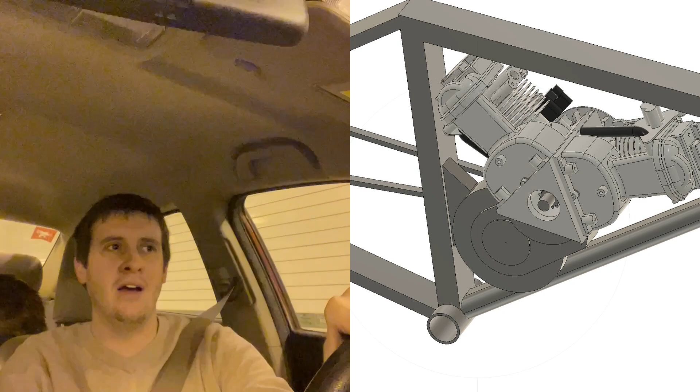Everyone, Ryan here with RDM, and we're going to give a motorized bicycle update. We're going to talk about that most recent video where my Piaggio bike was ripping up and down with the centrifugal max torque clutch and the pull start. I know a lot of people aren't very familiar with that, so we're going to talk about that, explain what it is, and we'll do a little deep dive on that whole situation.

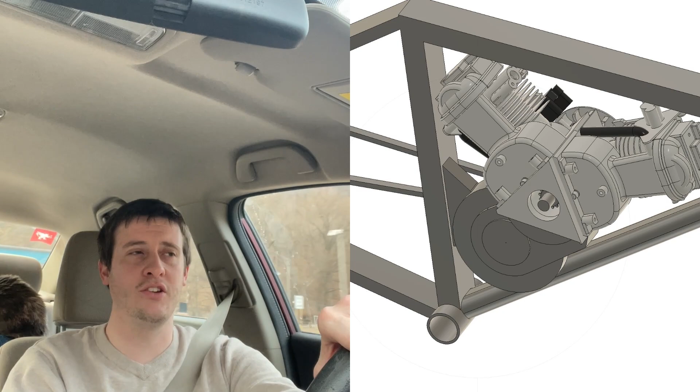We're going to talk about the crankshafts. I know there's a lot of people waiting on crankshafts, and the pre-sale's still up. And yeah, we got a lot to talk about with the crankshafts. It all ties together with everything.

And the final thing, the big thing I'm most excited about and I want to talk about, is that V-twin. And I know nobody knows anything about it because I never talked about it. I just put some vague pictures that aren't very completed, and yeah, so I want to talk about that. We'll get to that. It all ties together.

The place to begin is that latest video. We'll start with the specs. Well, anyways, I posted the video a few days ago. If anybody missed it, go into the group and search my name and you'll find the video. It's not a very good video, but it does demonstrate the basic function of that type of setup, and it shows the bike does go pretty good. It's not the fastest bike, but it might be. It could be. By the specs, it shouldn't be the fastest, but it still could be.

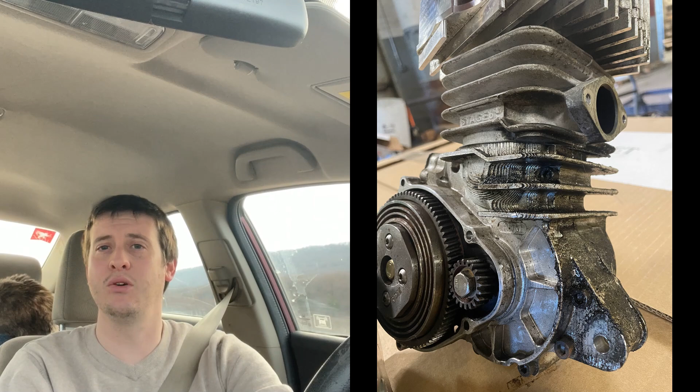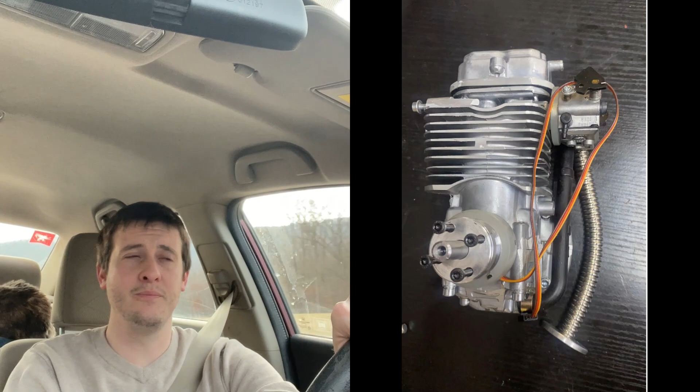So that's a 40-stroke Piaggio. That's not the classic 44.5 or 45-stroke. That's why it's using the stock head, the small head. And I know somebody was asking in the comments, does that keep the engine cool enough? It depends how you ask the question. In a race, I think it would probably work, but you'd be pushing max temp and maybe overheating by the end of the race. It depends on the track.

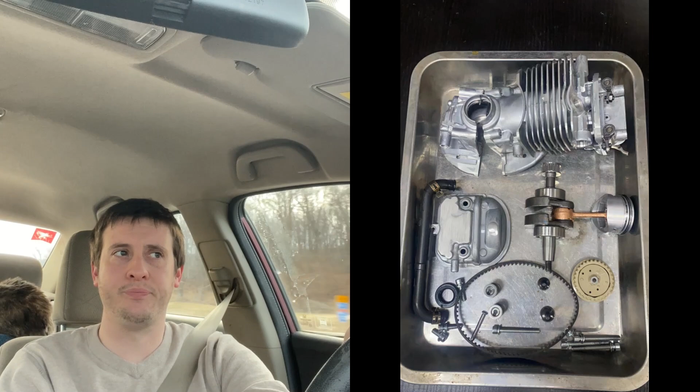If you were going to be trying to hold top speed for a long period of time, a long distance, it would probably overheat. But for just testing and working on my skills and doing quick little laps in the parking lot, it works well. You can probably see from the video, the bike gets faster and faster as it gets hotter and hotter. That's typical with these Piaggios, they like heat. They don't like being fully cold, but they still run good no matter what.

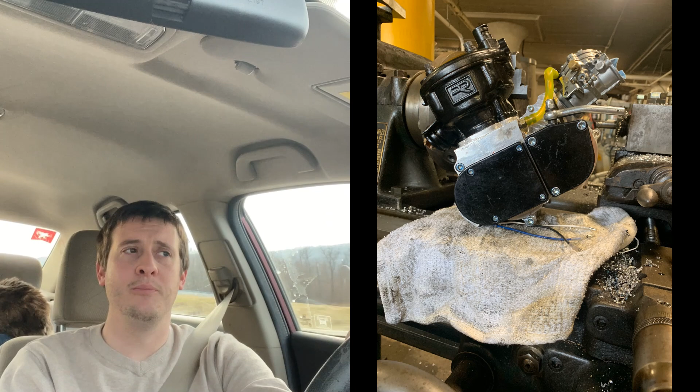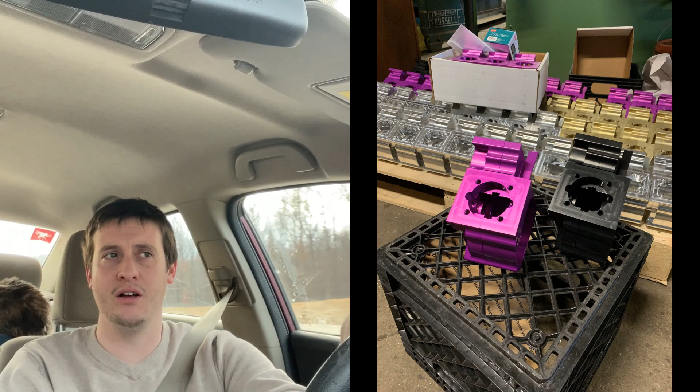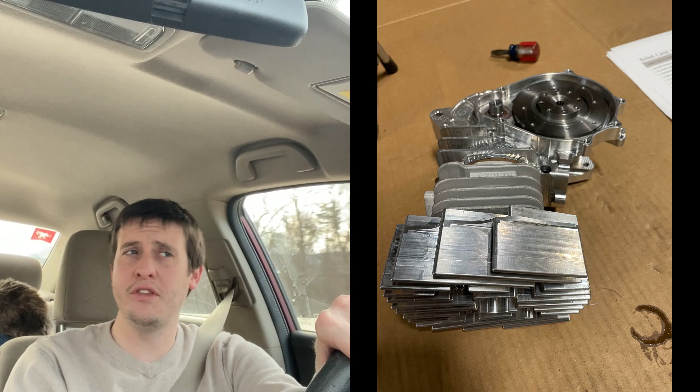Yeah, so then there's a lot to talk about, like my impression of that setup. A lot of people are familiar with that setup if they're coming from GoPeds or mopeds. A lot of them have that type of setup, just a centrifugal clutch. A lot of the 212 mini bike guys, you just hit the gas and it goes. And some of the things I'm about to talk about are going to seem real familiar if you are familiar with that type of system, which is a centrifugal clutch.

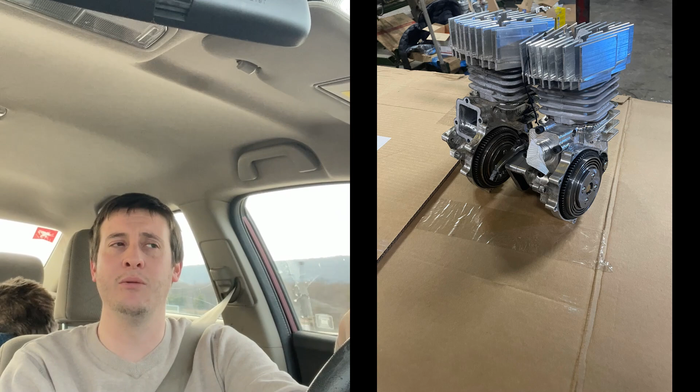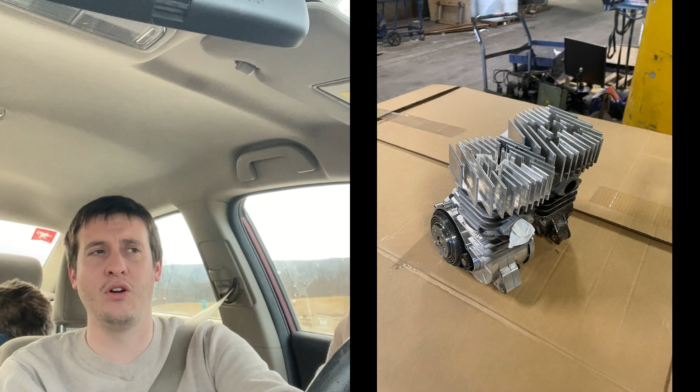I went from the $20 Amazon clutch, I'm sure everybody's seen them, and that engaged at about 1,800 RPM, to a max torque set up to engage at 2,800, so an extra 1,000 RPM. My engine has something unique to these types of drivetrain systems, which is it has a primary drive. The primary drive is the chain drive. Normally, our engine's primary drive would be that gear drive. The gear drive is about a 4-to-1 ratio, roughly, and my chain drive, because of the limitations of chain drives, is about 2-to-1.

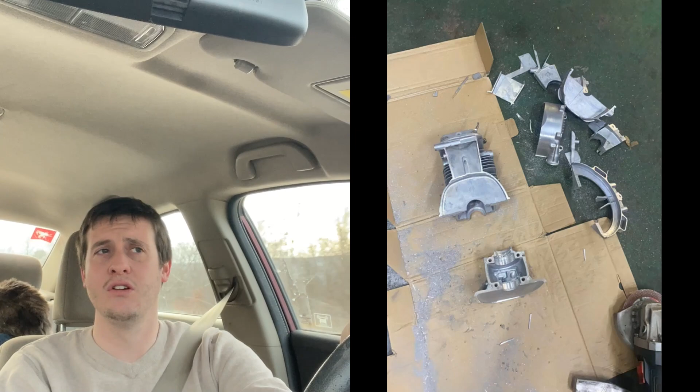Now, if I wanted to work around that limitation and increase the gear reduction with the chain drive, I suppose I can up it a little bit, but I would start risking having the small sprocket skip teeth, or I would have to increase the center to center distance of the sprockets. Neither of them are ideal, so we're kind of stuck to 2-to-1.

With the 2-to-1, it works great though, as far as the clutch thinks it's a 212 engine. It takes the reviness of the extremely high RPM of the two-stroke Piaggio, and it cuts it in half. So it then starts to pretty much match a well-built 212 engine, and that's what it feels like when you hit the gas. It's great.

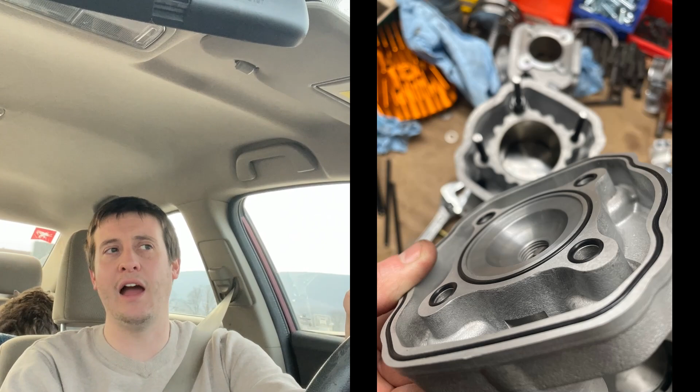The one thing is the primary drive chain is very, very short, and it's not an oil bath, it's out in the open, so you have to keep it oiled pretty often. So for race applications, it's no problem at all. But I did notice, you know, I've been testing these out for about a year now.

If you're going to daily drive this thing and you're going to put a lot of hours on it, the chain does wear out in about like 2 months of heavy use. And if you forget to oil it, you can actually get the chain to overheat. Because it's so short, it goes around those bends very many times a second. And because it is the primary drive, it is on a higher speed circuit than the chain that would go to the rear wheel. So it moves faster and it circulates faster.

It's also, according to the engineering handbooks and all that, slightly past what the chain is rated for, so we are abusing the chain. Not ideal. The way to get around that would be to increase the tooth count on both sprockets, the front and back. That's where we're really crossing the line. It's not necessarily the horsepower or the RPM, although we are with RPM. It's how small that front drive sprocket is.

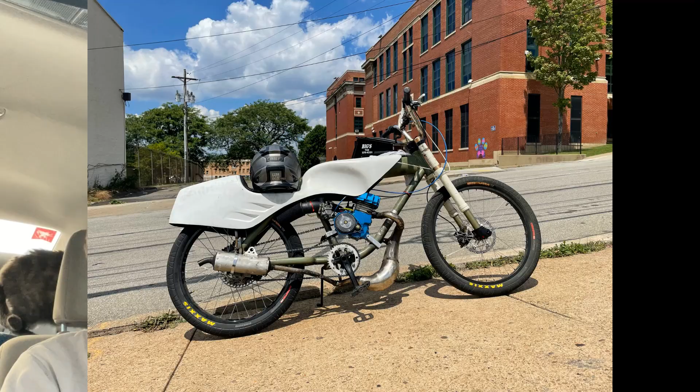So it's not a perfect setup on paper. It does work, and it's as simple as that. And it does prove that this type of drive chain can work with our two-stroke engines. And now let's talk about how it applies to racing, and I want to also talk about how, well, I'm going a little fast here.

Slow down. This freaking cat too.

We're going to also talk about how these engines apply to if you're going to daily drive it and ride it on the road. And yeah, that's really where this is going to get interesting.

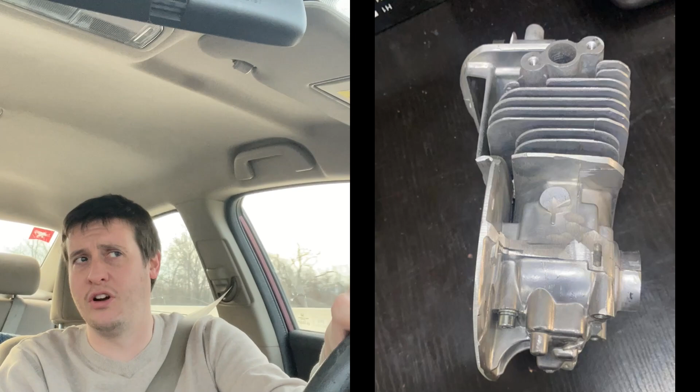So on the racetrack, it turns out there's about 2 straights, and you're not on the straights even a fifth of the time you're racing. Most of the time you're leaned over and you're bent over in a turn, and the turns, some of them get really tight and slow you down a lot. You have to really scrub off almost all your speed and then hit the gas and get out of there again.

So it turns out that where you gain the most is when you hit the gas going from a low speed coming out of a turn. You want to really, really quickly get up to not necessarily full speed, because before you know it, another turn's coming up. You're not really getting to full speed, except for on the 2 straights. But you really just want that mid-range grunt to just kind of blurp you forward.

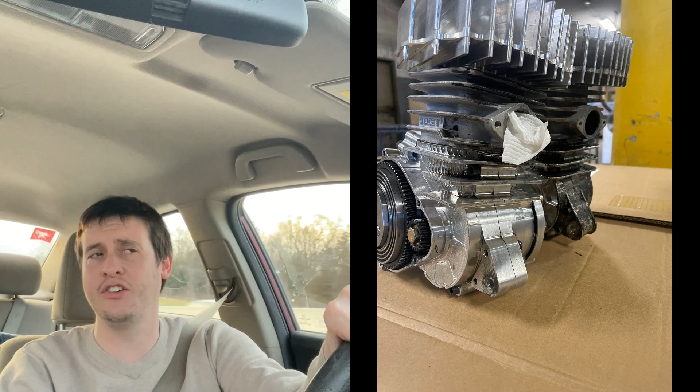And unfortunately, a lot of times with our 2-stroke engines, that zone lines up perfectly with right below where the pipe is. So that pre-pipe staging kind of chokes you up. Now, we've done a lot of work with the Piaggios. We sacrificed a lot of peak horsepower to kind of make it so that the before-the-pipe weird section is minimized, or even pretty much erased on these Piaggios. And we do that with lower timing, with the oval exhaust port.

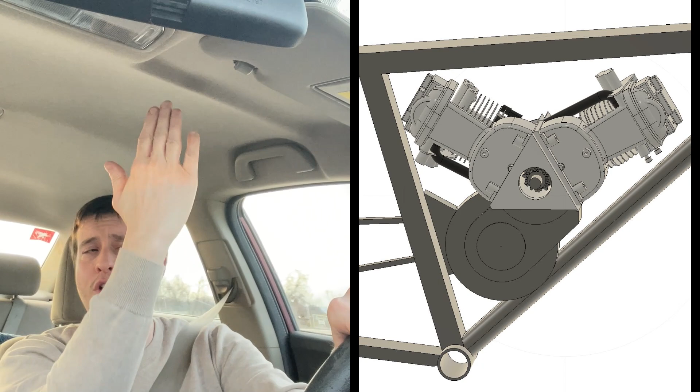And then on my race engines, what I like to do is take sandpaper and pull a band like this through the exhaust port, angled upward towards where the cylinder head would go, and I just pull it a bunch of times, and basically put a little radius in the middle top lip of the exhaust port. What that does is it kind of kills the peak power. It makes it so the pipe hit isn't as sharp, isn't as impressive.

But what it does in return is it spreads all of that power that you're scrubbing off everywhere where it would have been missing. That's probably an oversimplification, but that seems to be the case. That with a low timing and a pretty much square engine, which isn't that common in our hobby, since we're mostly working with big bore kits, it works.

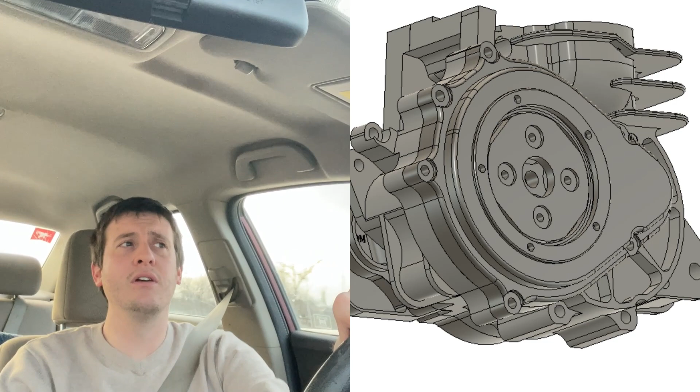But there's another way around it, and that would be this clutch. Let's say we put a bully clutch on this, because I noticed with the higher stall clutch, it gets better and better. It gets faster and faster as far as how hard it pulls when the clutch is in slip mode. Because with a centrifugal clutch, there's two modes. There's slip mode, and then there's lock mode.

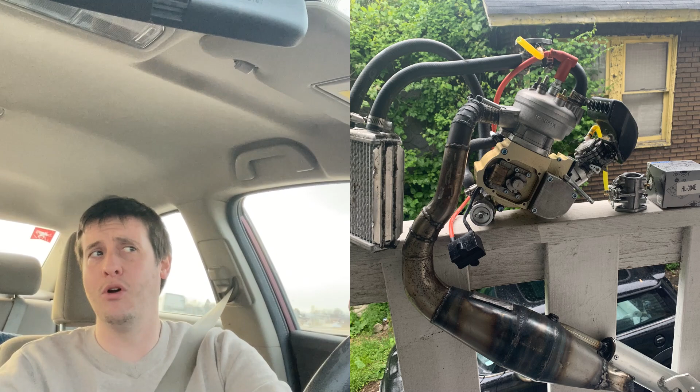And you can make it so the lock mode is only at the very, very end of your RPM range. That's how you get the most acceleration. There's some downsides with that, but they don't actually apply at all when it comes to racing, unless you are putting down too much power coming out of these turns. We have small engines, we don't really have that problem. It would be nice if we did.

So, long story short, on the racetrack, a centrifugal clutch, especially like a bully, that's the winning formula. And especially if, in theory, not that I've done it or tried it, but in theory we can go back to building these two-stroke engines by the book and go back to like triple exhaust ports and a maxed out race setup.

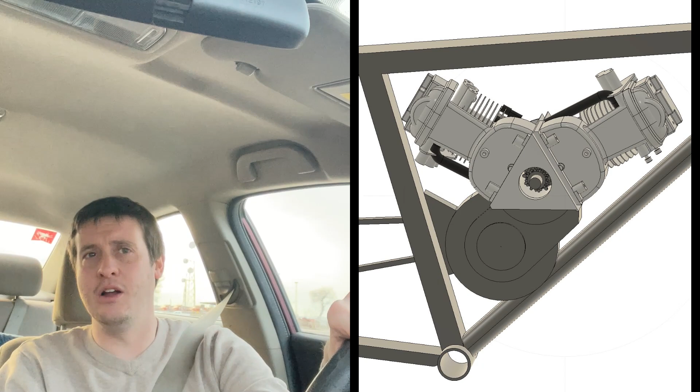We're going to have that dip of power right before the pipe hits. But if we set the clutch to have a stall speed above that dip in power, in theory, on paper, that's the most power you can put down. That's the fastest bike you can build with a two-stroke.

And you kind of saw that from the video. That doesn't look like a 40 by 47 build. That seems like something special, and it kind of is. But a lot of it is that clutch. So now we're going to talk about the downsides, and this will actually lead into that V-twin engine.

So the downsides are, if you want to ride a bike everywhere and use it as a daily driver with these race engines, they can do it, but we then have an issue. Because we went to such high RPM and the higher stall clutch and just the nature of these engines, they're really ferocious and really, really powerful. They're not really very practical for street use. You have to be a very disciplined driver, a very experienced driver.

And you have to change the gearing. You can't use race gearing on the street. You can, but it's actually pretty much reckless. Literally, even if you try to drive carefully, it just accelerates so hard and it screams so loud. It's pretty reckless. And to me, that kind of loses some of the magic. It loses some of the nature of this hobby, because I like driving them on the street. I like commuting with it.

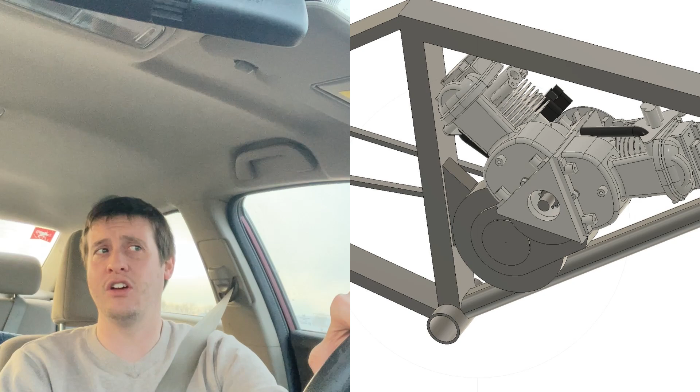At the same time, I think there is room for these bikes on the road. In my family, we've had electric bikes. I've enjoyed electric bikes, and I've been pleasantly surprised by their performance. They're great. And many of you may remember, I was looking to invest in expanding into electric bikes and really seeing what we can do with it. And I still may. But they have some safety issues.

And there's a lot of money involved in just the batteries, and I'm not ready to lay all that money out. I'm not built for buying tens of thousands of dollars worth of batteries and divvying it up, and they're a fire hazard. They scare me, and I'd be afraid for my customers. I thought about how I can make these safe, and I didn't come up with any good or cheap answers. They're not safe. I'd rather take my chances with gas.

And then we're back to the other problem with gas. These race engines are a little bit too harsh. They're too loud. They're way too powerful, like two or three times as powerful as they need to be to be on the street. When you're on a racetrack and you have a race helmet, gloves, motorcycle jacket, there's a paramedic nearby, there's insurance available, and people looking out for you, so you're not going to just be on the side of the road and found the next morning or something.

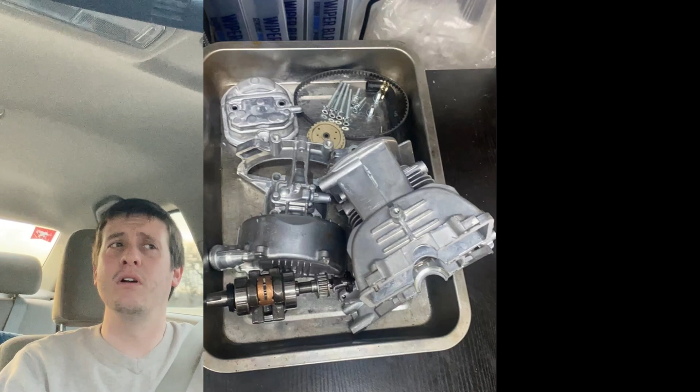It's a different situation, and then it's fun to have three times as much power. We're on a closed track and there are no cars going by that aren't going to realize a bicycle is going to come up beside them at 55 miles an hour.

So they're amazing on the racetrack, but we have issues. They're not good for the core hobby's mission statement, which is getting people back and forth to work, taking pleasure cruises, maybe converting your household to be a 1-car household or a no-car household instead of maintaining these expensive vehicles and insurance and all that. It might not be worth it to some people.

And for me, the racing's in California. I'm on the East Coast. I like driving them on the road. I want to go back to that. These race engines, there's no way to make them quiet. You can do everything you want to do. You can put a big airbox on it, a big muffler. It's gonna scream. It's gonna completely go berserk. There's no way to make it quiet.

The vibrations, they're tolerable. If it was just the vibrations, I think we would manage. We would find a way. We'd make the bike heavier, and the weight of the bike would suck up some of the vibration. But otherwise, the noise and all that, and the power, really.

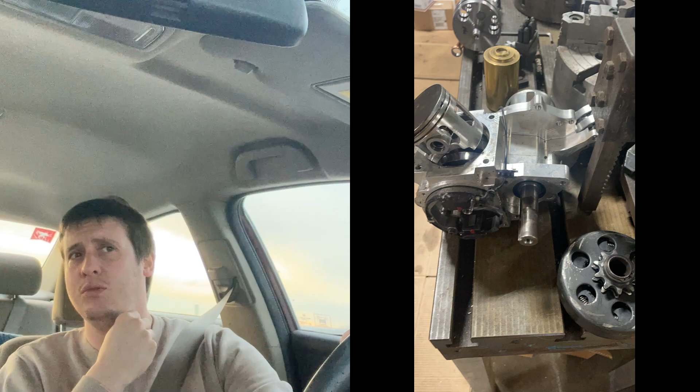So in addition to all that, I've talked to, maybe besides me, 3 of the main influencers in this hobby about this very issue, and most of these guys have heavy influence on the China side, the China manufacturing, and really great people. Luckily we have a really good, open, honest conversation. We tell each other the truth and we try to all make sure that the health of the hobby is maintained.

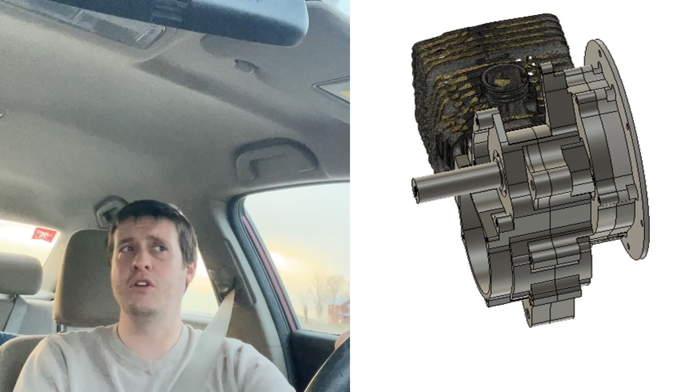And essentially everybody is worried that these engines are so powerful, they're so ferocious, that it's going to be the catalyst that rolls in regulation, and worst case, shuts down the ability for China to import these engines into America. And even just one country going down could be a big loss for China. And we definitely appreciate what they do for us. We wouldn't have these motors if it wasn't for them. So we definitely don't want anything like that to happen.

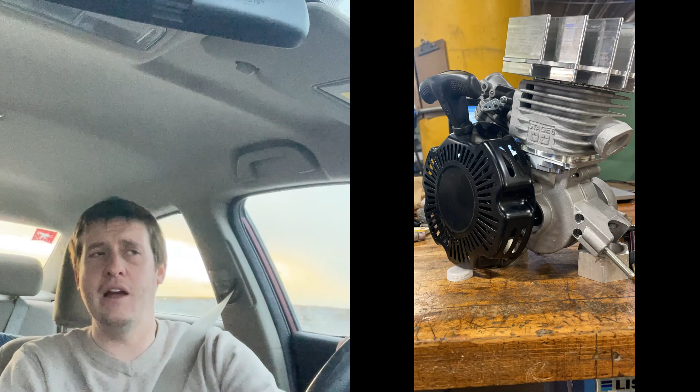So, my next natural step would be to either keep developing these motors, try to bring down the costs on them, or increase the horsepower, add cylinders, make it a 2-cylinder, work on the clutch. It never ends. I could just keep going and going, and that's what I do. I always maintain a pretty hefty R&D budget, and I do a lot to just keep pushing forward. And that's been the case.

I have 3 or 4 complete designs that are all different for a more powerful version, a more refined version of this 2-stroke. And they can have multiple cylinders. They could have a different primary drive, a different clutch, a different ignition. I even have ones that use a different crankshaft, have balance shafts.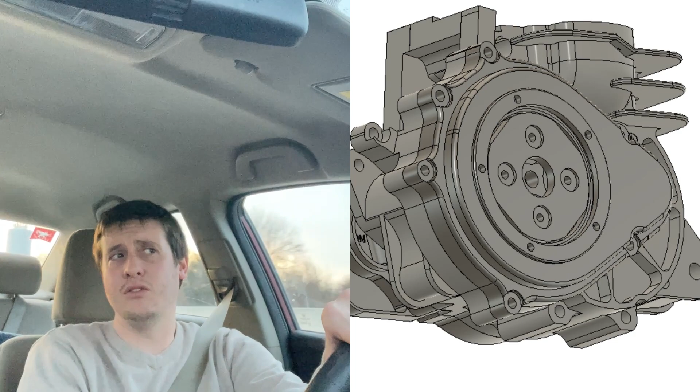But again, talking to these guys that have a lot of influence, 3 different guys, we're all saying the same thing, and I'm saying the same thing too. These things have a little bit too much power. They just do, and it's scary. It's scary for everybody involved in this hobby. It's fun on the racetrack, but otherwise, I don't feel comfortable just going all out like I have been developing them.

And there's another push too. I don't know all the reasons behind it, but the 4-strokes are interesting, and some guys are switching to the 4-strokes and electric. It's like the people that get scared of the 2-stroke or get a bad taste in their mouth for whatever reason, they seem to start going towards the 4-stroke. So I've done a deep dive. I've always been a 4-stroke guy.

I've had the 212s back when they were the GX200 clones. This was back in like 2005. We got them, we put the Comet CVT on it, and what a great drivetrain. And I always had one major complaint with them though, and I still do. I don't like the packaging. I think they're too wide to fit on a bicycle. I know others feel the same way.

They're also heavy. Without a clutch, it's 40 full pounds. That's more than double what our engine weighs, and our engine has a clutch and a primary drive in it. They don't have a primary drive, and when you do get a primary drive, it's a known weak point of the build. When you have a 212 build on a bike, that jack shaft is going to need maintenance. You're going to have to adjust the chain length. The bearings are prone to go bad.

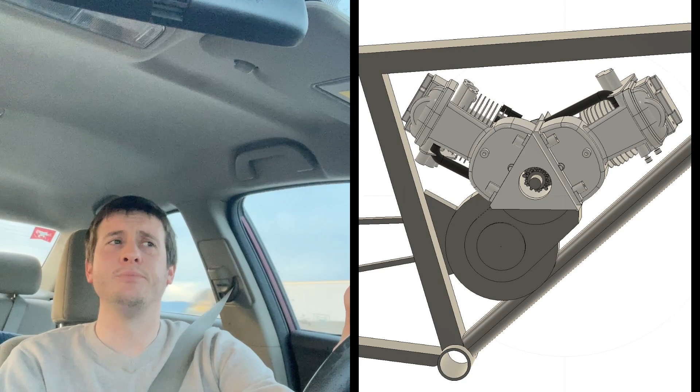And it's a source of noise too. It also makes the bike wider, and it can chew up your pants. There's also a significant cost involved with buying the jack shaft, and it's necessary. We need a primary drive.

For a 2-stroke, you need a primary drive of about 4-to-1, and for a 4-stroke, you can get by with like a 2-to-1. And the other alternative is to put a sprocket that is roughly 50% the diameter of your rear wheel, which is pretty large. And that's essentially what I did with my 2-stroke by putting that 96 tooth on. And the reason I did that is because I have a high revving 2-stroke, and I only went a 2-to-1 primary drive.

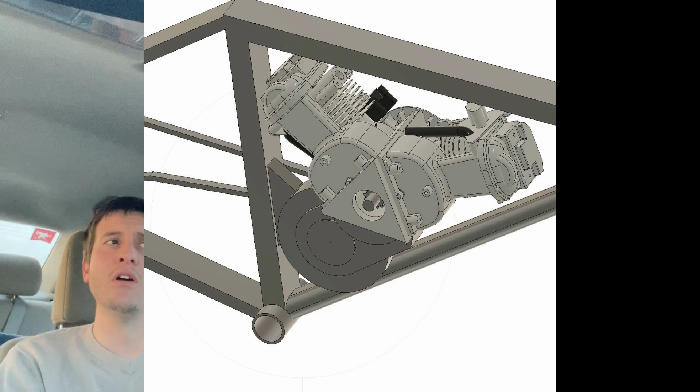So my clutch is still spinning at 8,000 RPM. That's like a built 4-stroke. So to have race-ready gearing, I needed a jack shaft or a really big rear sprocket. I went the really big rear sprocket route. So that's the thing with the 4-strokes.

And then I also think that the 212s have too much power for a bicycle. I don't like that. I don't like 40 pounds. I think that's way too heavy. Like way too heavy. So then I really looked into, and I love these little 4-stroke weed trimmers. And then I like the heavier duty version. They call them the GX50H or the 140F or the 142, 144F. Those engines are really cool. And they're still like 50, 53cc, about 2.5 horsepower. Really, really cool engines.

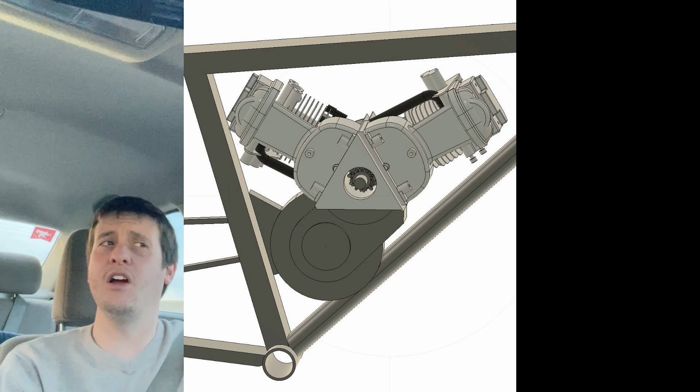But the small 4-strokes all have one major issue. They're not super heavy, but they rev pretty high, so they're going like 8,000 RPM. The problem with them is they have a clutch mounted on the crankshaft directly, so the clutch spins pretty fast, like a well built 212. And what ends up happening is this small, lightweight little 50cc or 53cc 4-stroke engine ends up being 10, 11 inches wide from pull start to the end of the primary drive housing.

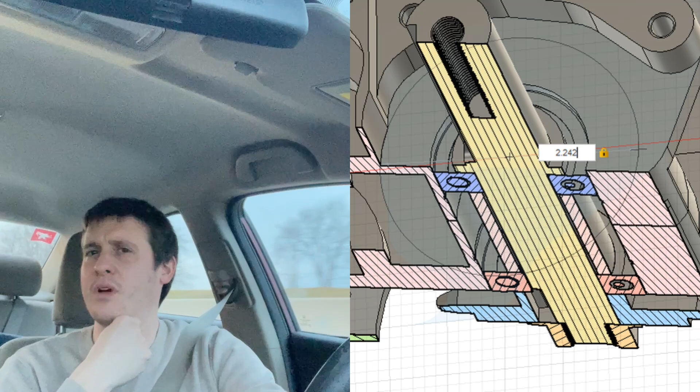And it's just the way they do the clutch. Everything has to stack lengthwise. The clutch has to go at the very end on the tip of the crankshaft, and then you have to put the clutch bell, and then the clutch bell has to have a support bearing, and then on top of that support bearing, it has to have a primary drive gear or belt roller. Sometimes you can put the bearing underneath that belt roller or chain drive, but then you run into another issue trying to make that bearing compact. That bearing becomes a weak point and you'll have reliability issues.

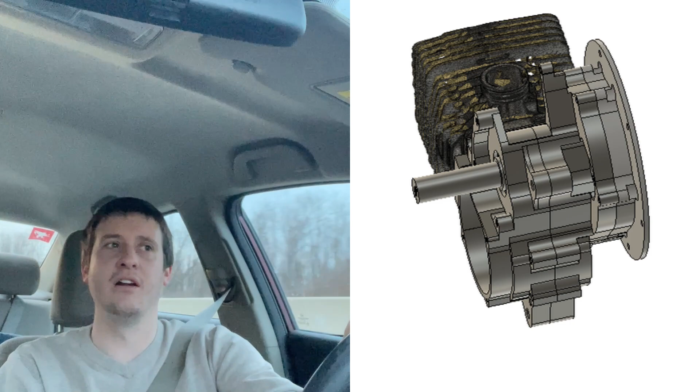So it's tough. Those small little engines, how cute, I love them, but their primary drive just kills the whole deal. They're so bad, it almost makes it worth it to go friction drive and just have a roller rolling against your tire, because at least it makes your build a little bit narrower and you won't have all those weak points. But you don't want a friction drive. It screws up the tire. I don't recommend it, and you have to have your engine hanging off to the side of your tire, so your bike's gonna have a weird balance. On the kickstand, it's gonna want to fall over a lot of times.

So the small ones, at least they're not too heavy. They have a primary drive issue. The 212, there's nothing you can do to make them lighter. And they're also too fast. It goes back to the original issue: too powerful, too heavy, too wide. So our two strokes, when they're built and you have a nice clutch on it, and maybe the billet engine has a little bit wider ignition cover, and my extended clutch shaft, which makes everything another 1/4 inch wider, you're somewhere in the ballpark of 6 inches wide. Now a 212 engine, you're starting at 12 inches, and it goes up from there, which is ridiculous. A foot wide that you have to fit in between your pedal cranks.

The small engines, these GX50 things, as far as I know, nobody's making anything that starts below 9 inches. And I would actually be shocked if one, all said and done, is below 9 inches. So yeah, they're also pretty wide. You need a wide pedal kit or reach your legs around. Also, they're 2 horsepower, 2.5 horsepower. They don't have almost any performance aftermarket, and they're not like a 2-stroke where you can put a Minarelli kit and triple, quadruple, 4 or 5 times the power. That's not the case with these. I don't really think that you're realistically gonna double the power that easily.

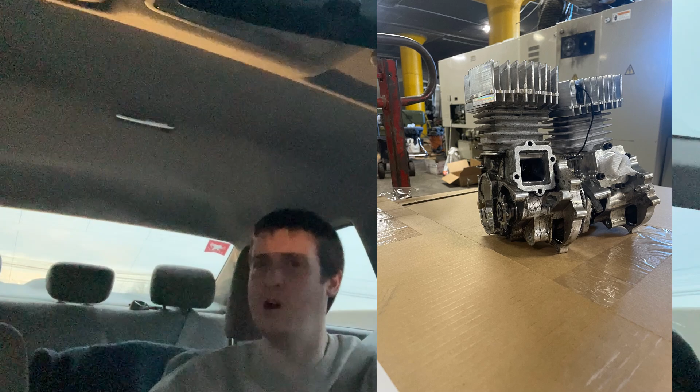So the new goal is to put the research and development efforts of RDM towards an engine platform that doesn't have this noise, vibration, harshness problem, that isn't overly powerful, that doesn't weigh too much, and that is not too wide, because that seems to be an issue. It's too wide. We also want to have it so that it has a predictable maintenance schedule,

and that it's going to be easy to support, and that somebody could maintain and support this engine on their own without me for a lifetime. I want to build these engines to last a lifetime. You may have to do rebuilds, but I want to make it so you can do rebuilds. You can get every part.

And this 4-stroke V-twin, I have really basic drawings up. They're not final. The V angle might change. I know it looks a little funny right now. Right now we're at 120 degrees, but it might tighten up. It might go towards 90, maybe 100. But that uses two GX50 engines, and it combines them together on a central crank. The crank is going to be a special in-house product.

And it's going to be interesting. It all will work. They're overhead cam engines. The engines with the gas tank, the exhaust, the fan shroud, ignition, everything and a clutch weighs under 10 pounds from the factory. So we're going to put two of these engines together. We're going to use one flywheel and one crankshaft. The crankshaft will be heavier. And we're going to have a primary drive built in.

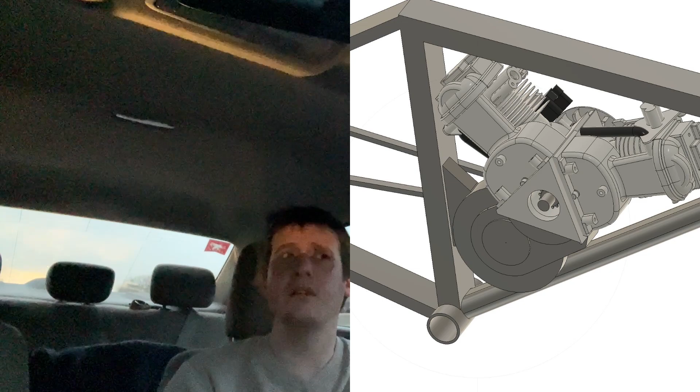Now for primary drive, this is a 4-stroke engine, so it has an oil bath. I'm going to run off the crankshaft a chain gear reduction. It's looking like we're going to be somewhere in the 3-to-1 range. Now with the 3-to-1 range, the engine spins about 60%, if that, maybe about half of what a built Piaggio spins.

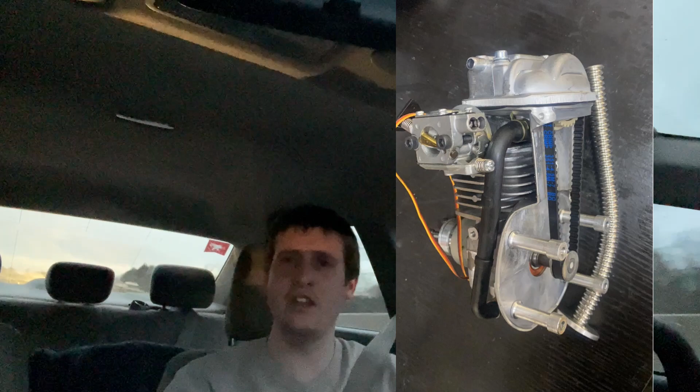So if I go to 3-to-1 reduction, that will make it so that we can use a go-kart clutch, and it'll put a lot of torque through the clutch because we're going to be tripling the torque.

But it'll work. And we should not need another jack shaft or any other reduction after that. You should be able to go right to the rear wheel and have a reasonable rear sprocket size. The primary drive, this chain drive, is going to be in the oil bath. It's going to share the same oil as the crankshaft. And it'll be a 35 chain, I think. I might go down to like an 8mm pitch chain, just a tiny bit smaller. And it's going to be great.

Very good. The goal is to have the small sprocket be at least 13, 14 teeth. It's better to have the small sprocket be no smaller than 12, 13. Ideally even 14. So that limits our final reduction. I'm not going to go to 4-to-1. 3-to-1, I think, is the target. Maybe even like 2.8 or something like that.

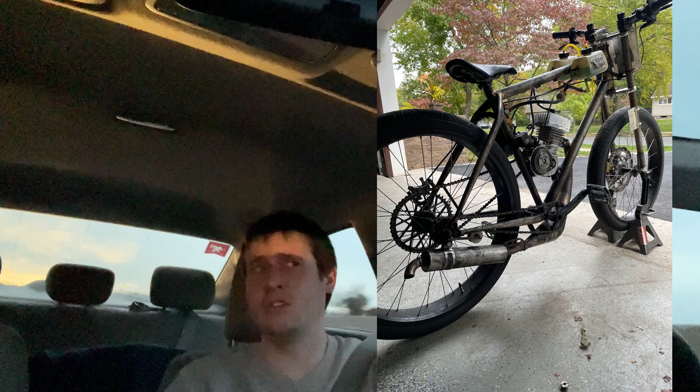But we're going to have a chain and an oil bath. So the Achilles heel of these 4-stroke builds, the primary reduction drive, it's going to be an oil bath. That will make it more reliable. Very excited about that. And then we're going to run the heavier duty 212 style clutches. So it'll be a big heavy duty oversized clutch for this build, but it'll run at lower RPM. So that should make these clutches effectively engage at a higher RPM. So you won't need to buy a $300-400 clutch. Even with a $20-30 clutch, you'll have a higher stall speed and you'll have good acceleration.

Now another big benefit, and no promises here, I'm going to do the best I can, but it's going to be a work in progress. We should be able to achieve an almost unbeatable level of balance because we have a V configuration. The secondary vibrations caused by the counterweight at 90 degrees will be effectively canceled out by another piston. So this should be the smoothest engine. In addition, by having 2 cylinders, long story short, it should be a smooth engine.

Because it's a 4-stroke with some smaller pistons, it should be quiet. And because it's a 4-stroke, we should at least have the option to make it quiet by putting on better mufflers. With a 2-stroke, you can put on any muffler you want, it's not going to get quiet. And if it does get quiet, you're not very powerful. With the 4-strokes, we can actually, I think, make a quiet 4 or 5 horsepower.

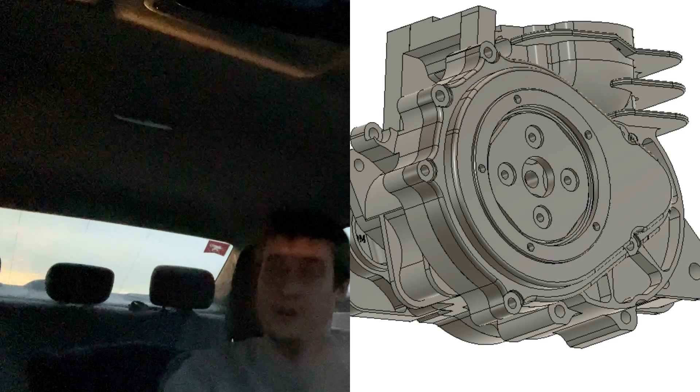Now, I'm going to make these right away. I'm not exactly sure how people are going to take to these or what the demand's going to be. And the demand does affect the final price. If I'm going to be making only 5-10 a year, it costs a lot more than if I'm making 50 a year. That's just how it goes. So I'm going to need to gauge how you guys are responding. The plan is this: make a limited number, at least 3, maybe as many as 10 to 12 max. They're going to be at a more premium price, but you're going to get them soon. I'm going to have this first 3 to 12 built right away.

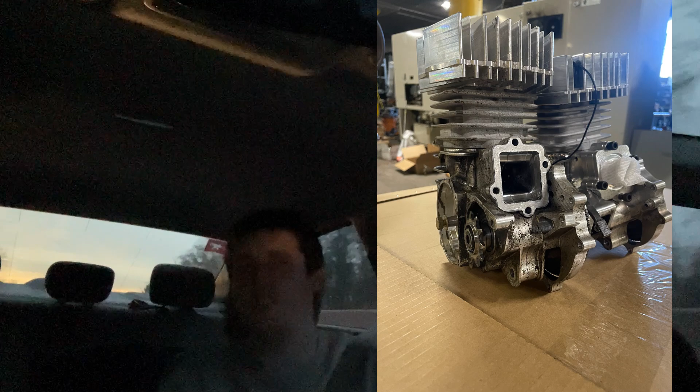And I might be picky with who I allow to buy them. I may allow everybody to buy them, but I may also give discounts to people who are trusted in the community, that have YouTube channels or post regularly on Facebook or are willing to. Or people with a friend group of 3, 4, or 5 enthusiasts who all have motorized bikes, are willing to make videos and really test this motor out, and really believe in this motor.

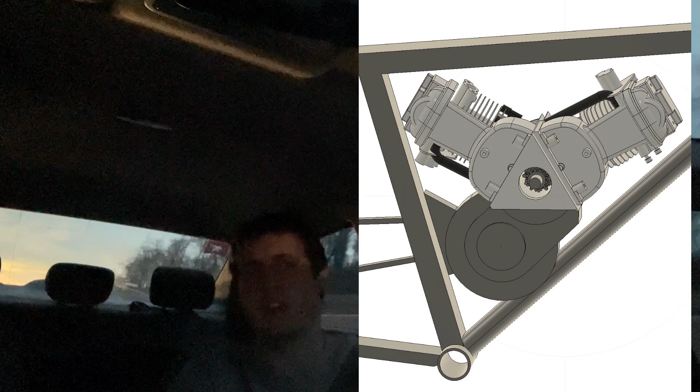Because these first 3 to 12 motors, it's critical that they all get put to the test. I want people that get these to install them as quickly as they can, safely, and really run them every day if they can. Try to break them. Try to overheat it. Try to do whatever you can to make it fail. Make something wear out. Make it make some sort of noise. Then we're going to immediately take that information to perfect the design, or keep the design if nothing happens.

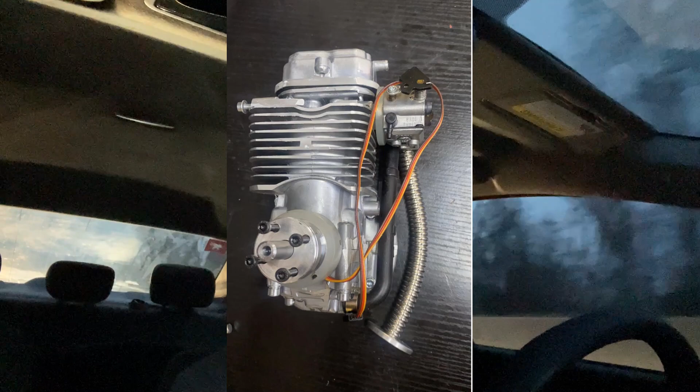And then we're going to move them on to production. I'm going to be a little more flexible with having some of the parts made by other shops. I'm going to be putting a lot of the parts out to bid with really detailed drawings so they can't skimp on quality. And the name of the game with this engine is I want to go right to the bottom with price on it.

Ideally, I think that it's possible to get these engines closer to the $500 to $700 range and not the $1,500 range. I think this first batch, if I were really to try to charge the full price, you're looking at about $1,500. I might take a little bit of a personal loss in this first batch, especially if I get excited about who's looking to get them, and see if you can get them a little bit cheaper.

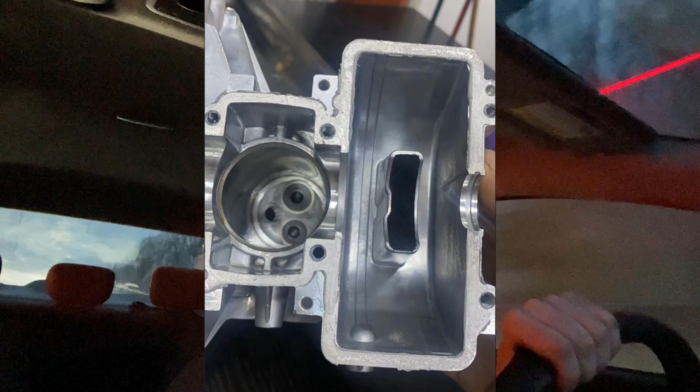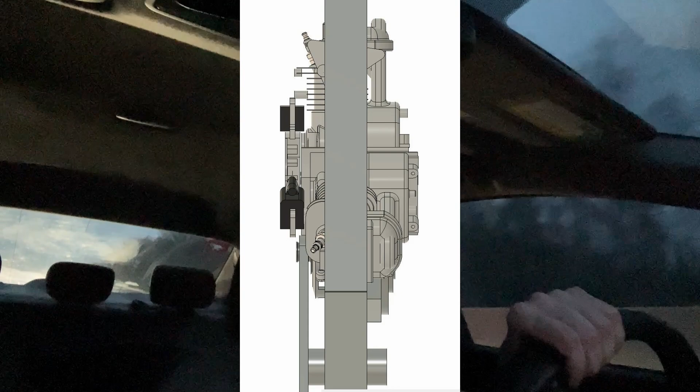Now, just a heads up for this first batch, the way I'm looking to structure it is I'm going to sell you a short block. So it's going to be the bottom half of the engine. It'll include the primary drive and the output for a clutch, maybe even include a clutch. But what you'll need to do is buy 2 GX50 engines or 2 GX50 clone engines, tear them all apart, and then slap them onto this short block to make your V-twin.

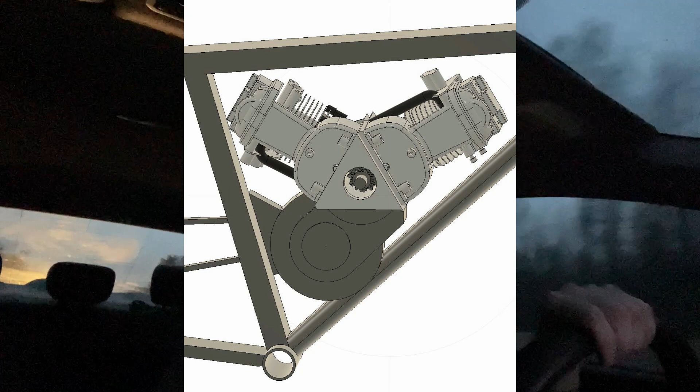And what that'll do is it'll make it so I don't have to go buy a bunch of these GX50 engines, because that would add up, and I don't have the money to go buy a ton of GX50s right now. Also, I don't want to be responsible if I go and buy 20 GX50s and there's something wrong with them. So you go and take the risk and see what happens. I will allow you to send them to me, and I'll take them apart and make sure everything's going to fit, so you have a guaranteed fit.

So yeah, very excited about that. I want to move forward with that right away. I have some shipping to do.

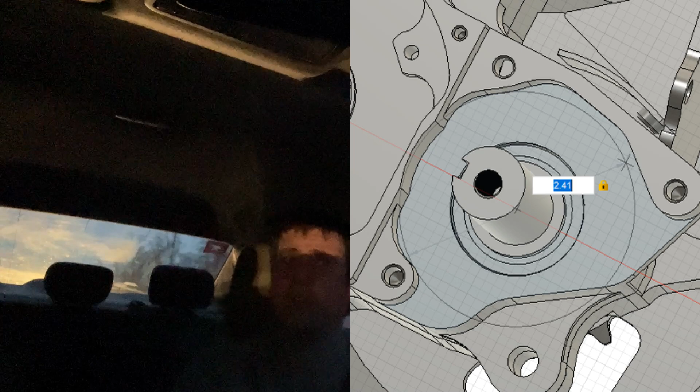And now about the cranks. I already put it out in the description of the other video. Yeah, the rods didn't come with the bearings. This is not the first time this has happened. I swear they do this on purpose. No big deal. But instead of just saying, hey, you forgot these bearings, just send me the bearings, or trying to just order the bearings, which would be a no-money deal for both of us, it's just such a small order.

I want to commit to ordering some more rods for this V-twin engine, because it needs a custom crank with custom rods. So that's why I'm kind of rushing forward and pushing ahead right away with this V-twin project. I want to bundle it in with these pre-sale cranks. I'm just also very excited about it. I want one for myself right away. I want to go back to riding these bikes all the time, and I have really high hopes for it.

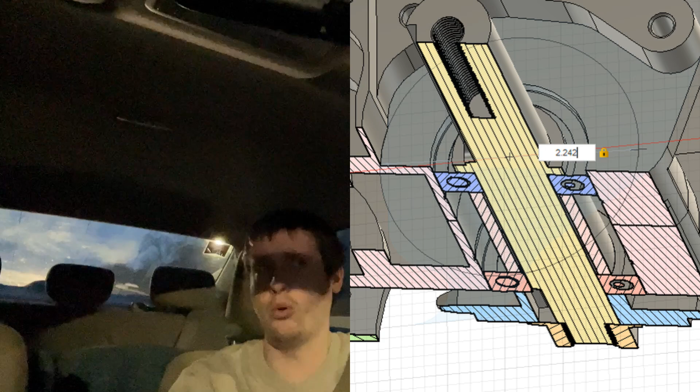The clutch. Now, if we go with the centrifugal go-kart clutch, not including the 3D clutch, we need to put the pull start on. Not the end of the world, but it adds about another 1.5 inches of width. Oh well. End game here is to have a manual clutch. The end game, actually, this might happen in a few years.

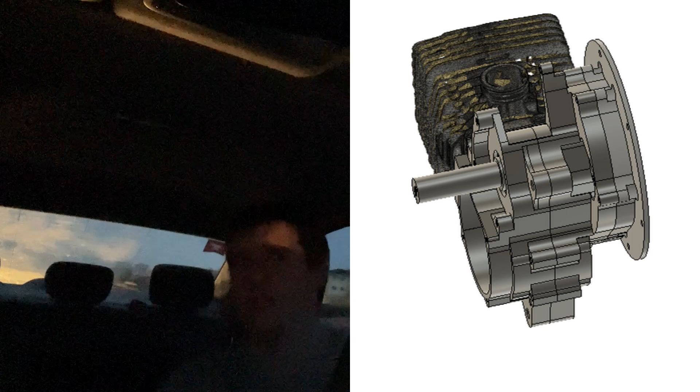I probably shouldn't say this, but where we're really going is I want to have a really well-made hydrodynamic torque converter, which is what a car has with an automatic transmission. It sloshes fluid around, and it makes extra torque at low RPM and acts like a gear reduction. So it's like you have a gearbox. And then when everything's going well and there's not too much load on it, it'll actually almost get you to a 1-to-1, like a 0.9 to 1 ratio.

So the engine's still going to spin a little bit faster, but basically you have an automatic transmission that'll increase torque down low, and also it'll let you idle at a traffic light without shutting the engine off. Another fantastic feature. So that's the future. I want to go to a hydrodynamic clutch, but in addition to that, I want to have a manual clutch. So it'll make it kind of like a fully automatic transmission. And it'll be a bump start, so we don't have to have a pull start.

You hit the clutch, it engages, and lets you start the engine. Then you let go of the clutch. I mean, it'll be a normally disengaged clutch. You hit the gas, it's like you have an automatic transmission. But then when you're going about full speed, you'll have like an overdrive option where if you hit the clutch again, it'll lock the clutch shaft together, and instead of being a 0.9-to-1, a slight slip from the torque converter, you would then lock it together and get a little bit of a speed boost at top speed. I think that's an unbeatable combination. Nobody's done this before.

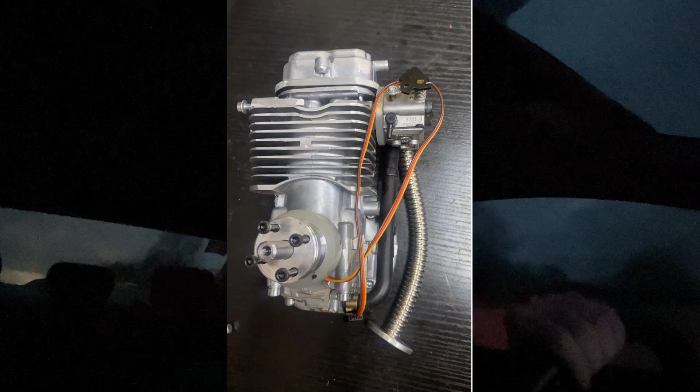And yeah. If I can, on this first design, on these prototypes, I'm going to make it so that it comes out of the box with a manual clutch. Because I think that would actually be supreme if we kept that China Girl manual clutch going, at a minimum price again. You know, you can upgrade and put clutch plates on it. Just to let you know where my head's at.

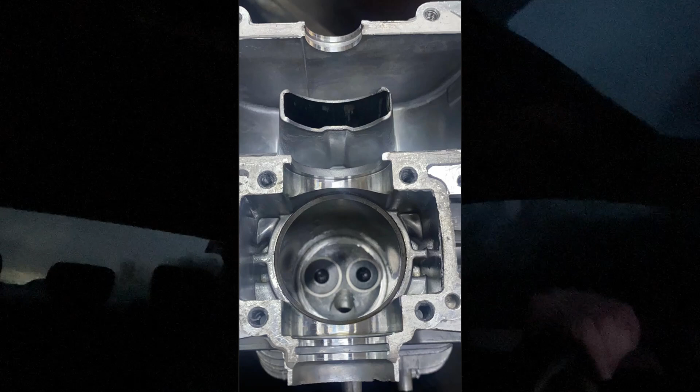But if I run out of time designing this thing, what I'm going to do is go to an automatic clutch where it has just a 3/4 inch clutch output. And you go and put on a clutch like you would on a Predator 212 engine. I think I covered everything.

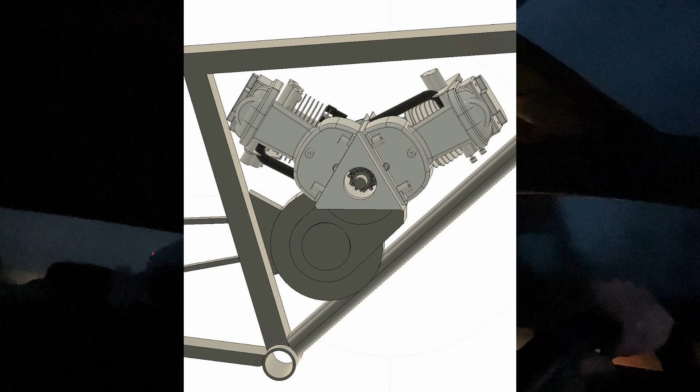So hopefully there's somebody or multiple people out there that will get excited about a V-twin, lightweight, 20 pound, 5 horsepower, only 6-inch wide engine. You know, we don't need crazy clown wide cranks. We don't need a whole bike that weighs over 120 pounds. I want to keep these bikes under 100 pounds.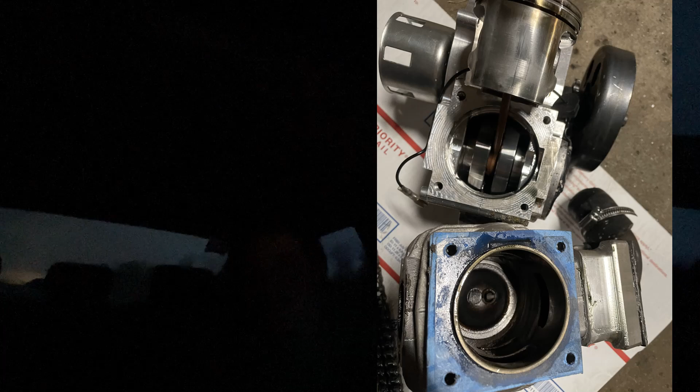And we don't need rocket ship power because, you know, when I ride my 2-stroke race bike, I get shaky. I'm afraid of the bike, I'm going to be honest. That bike is terrifying. I want to go back to not being afraid to ride my bike. And I don't want to be putting people in danger. I know there's some young people in this community.

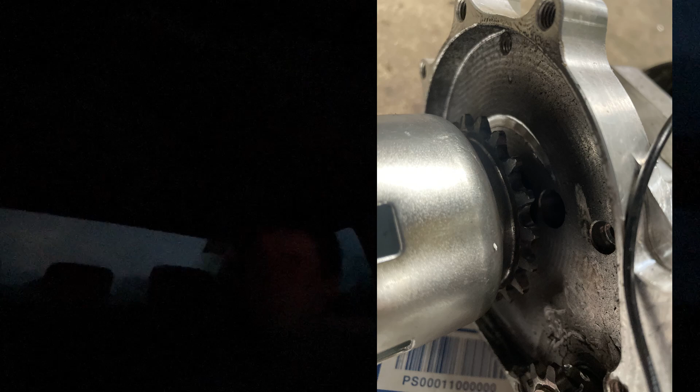Don't go jumping right into the fastest 2-stroke and then go riding on the street. There's some young guys that take the fastest 2-strokes on the track. Nothing wrong with that. But don't try to go as fast as it's possible to go on the street with a bicycle. So I think I'm circling back on some other things I talked about.